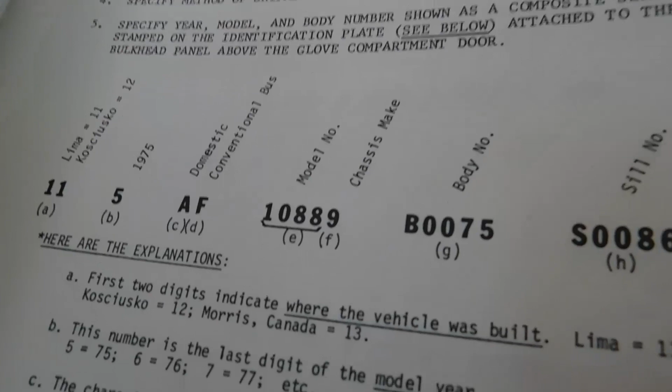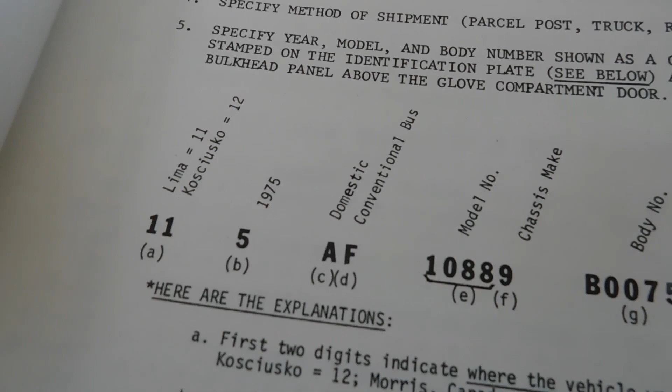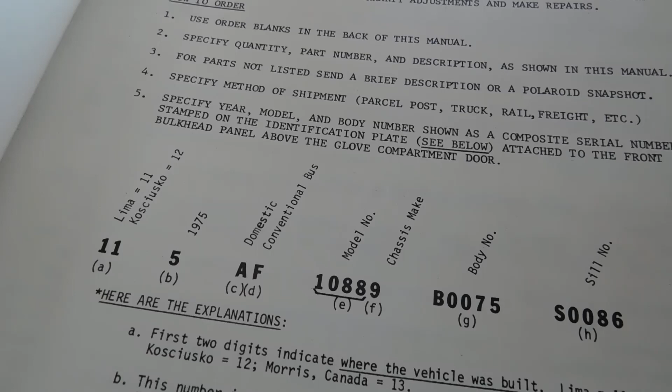And right here, what's really cool is it shows you what the parts of the VIN actually mean. So I'll go across so you can read them. It breaks down the VIN of the bus, and it shows you what all the numbers and letters actually mean. I think it was great that they put that in there because that could be pretty helpful to identify the bus, or if you just wanted to see what everything meant. So that's pretty awesome.

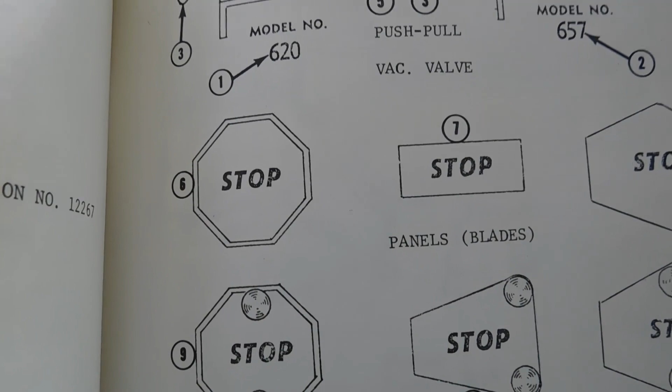So the first thing we're going to look at are our stop sign options. Looks like you've got your regular stop sign with no lights, stop paddle, this stop sign without lights, then you have a stop sign with lights, triangle stop sign with lights, and then that same shape but with lights. So those would have been your stop sign options at the time.

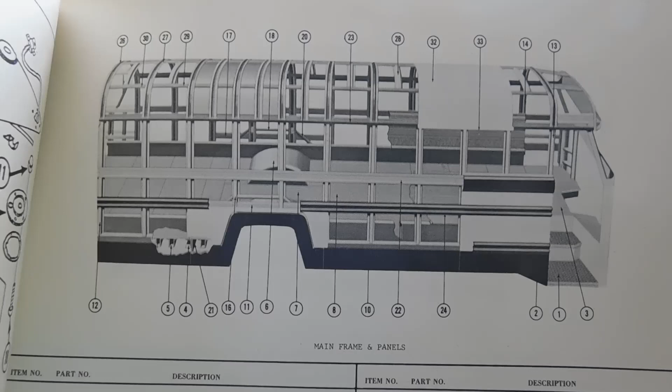So the next thing is this cutaway model that actually was a real model that salesmen would have had to showcase the body of a Superior. Very hard to find, but would be super cool to have in my collection, or for anyone to have in their collection. But anyways, that's basically the model, and you can probably tell all certain parts of it were actually painted. So to find one of those would be super cool.

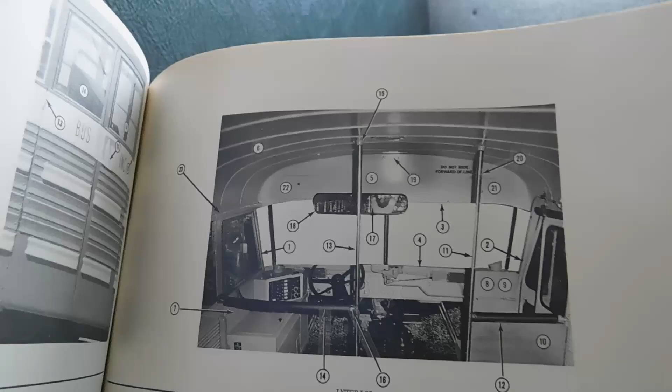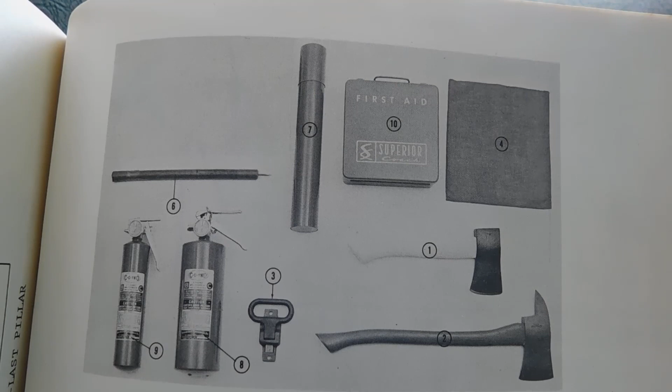Here's your inside shot of a Superior. There's your interior shot looking back of a Superior with no seats in it. Here you've got your picture of all the safety equipment, which what I wanted to show this for was for the Superior branded first aid kit, because you don't really see those very often, so that's pretty cool.

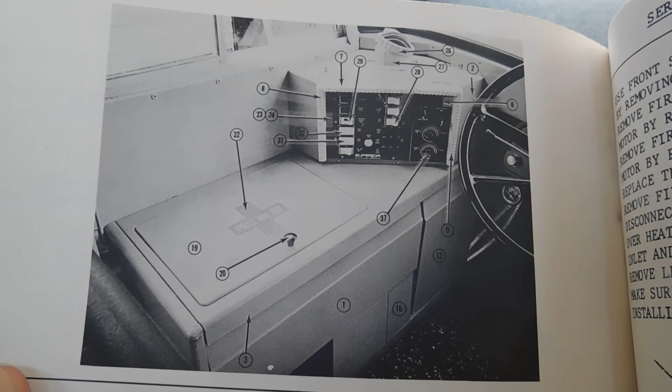Here's a picture of the console next to the driver. Got your switch panel, and then your spot. This little door right here would open up, and that's usually where the first aid kit would go.

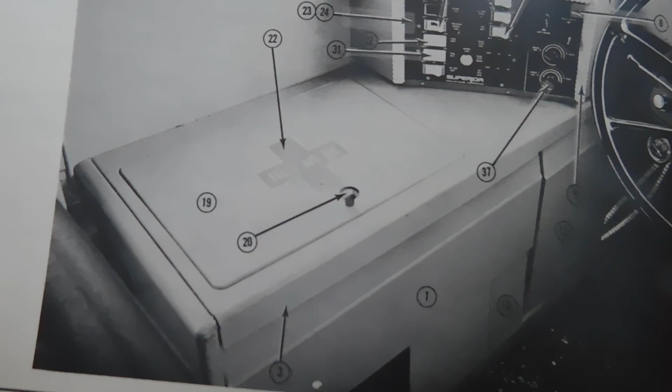But that's pretty much it. There's nothing on the back cover, but that's pretty much it.